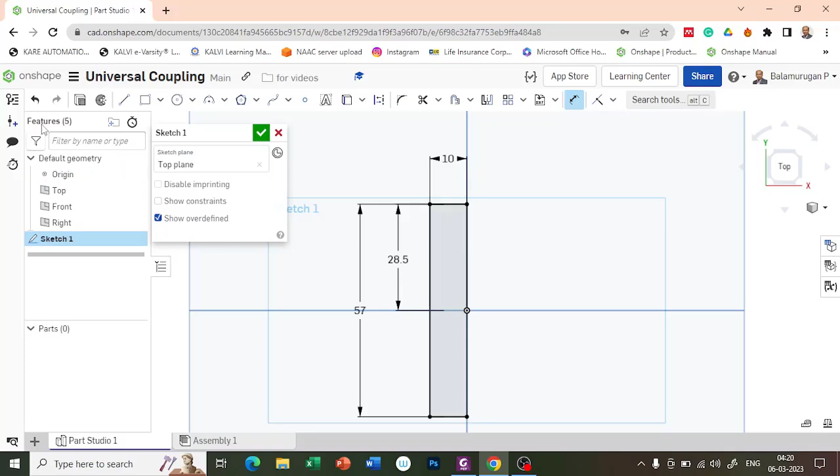Then a center circle which is of diameter 16. Then a second circle which is of radius 15, so diameter is 30.

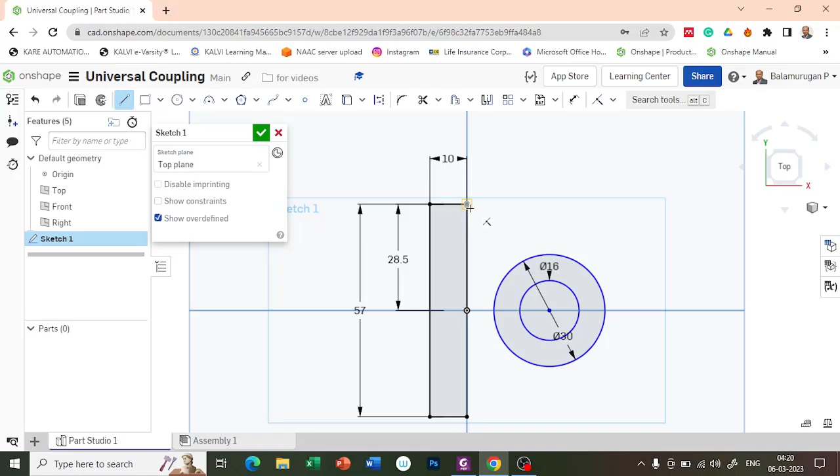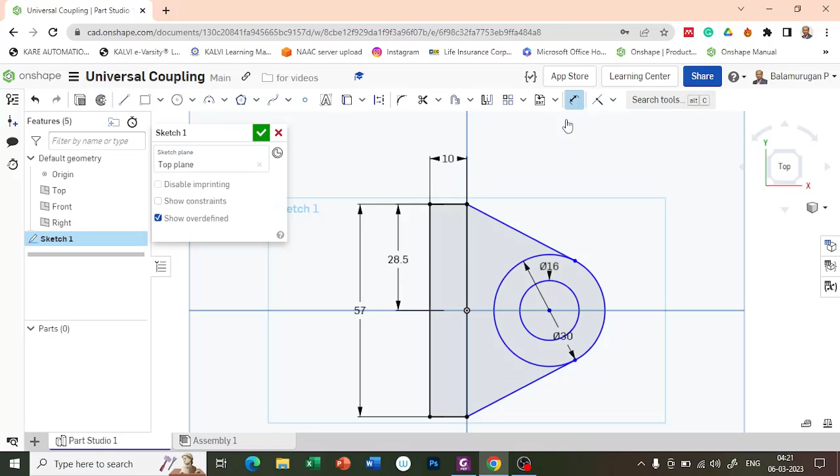Let's try to draw tangent lines from here, from here. The center distance between this end and the inner portion, so here it is 18.

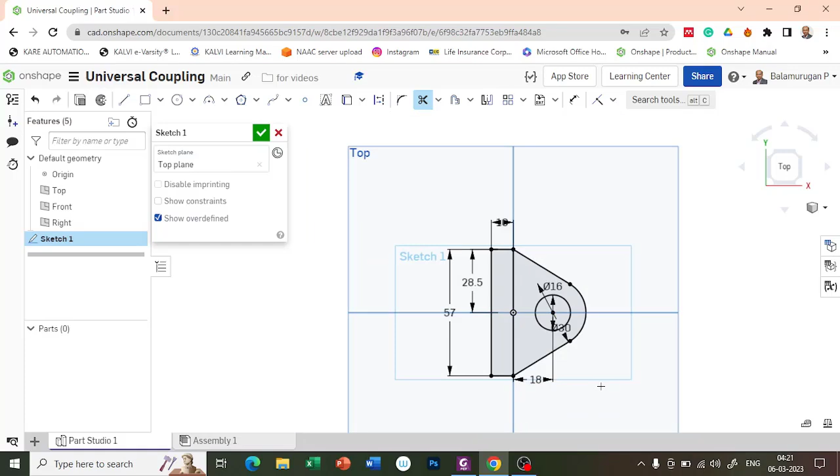And let's try to trim this portion which is not wanted. Okay, so let's confirm this.

So this one I'm going to extrude for a height, so extrude this two, which is symmetric, for a total height of 16 plus 56 plus 16.

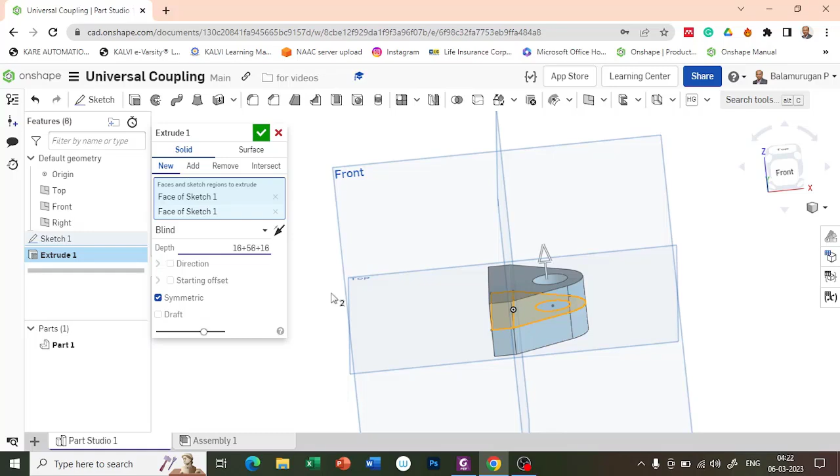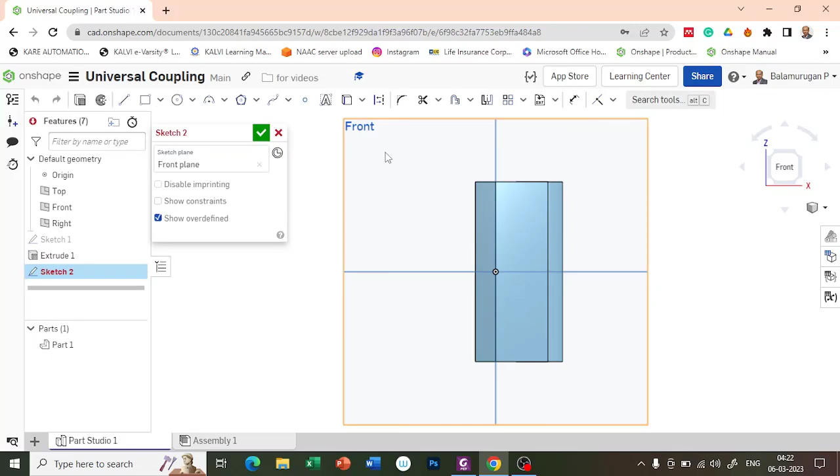So now we are going to make a cut over here. Let's make a sketch on the front plane, view normal to it.

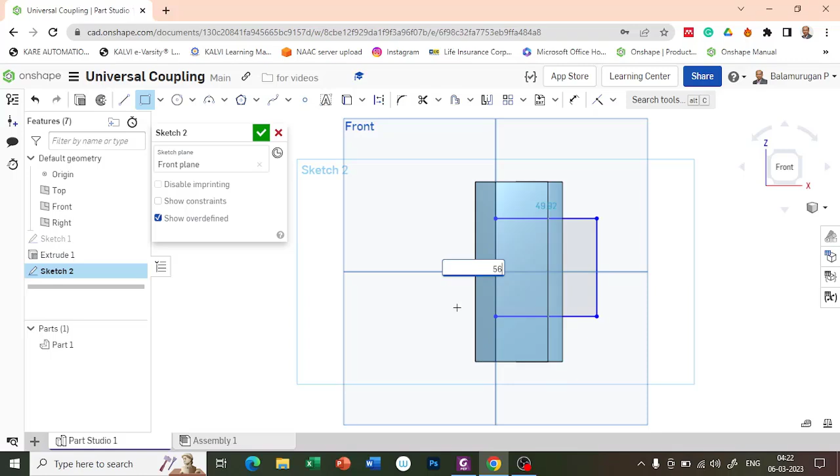Let's make a rectangular cut here whose depth is 56. The length you can define as anything beyond the material, and the center distance we have to provide, so 56 divided by 2, so that it will make a symmetrical cut.

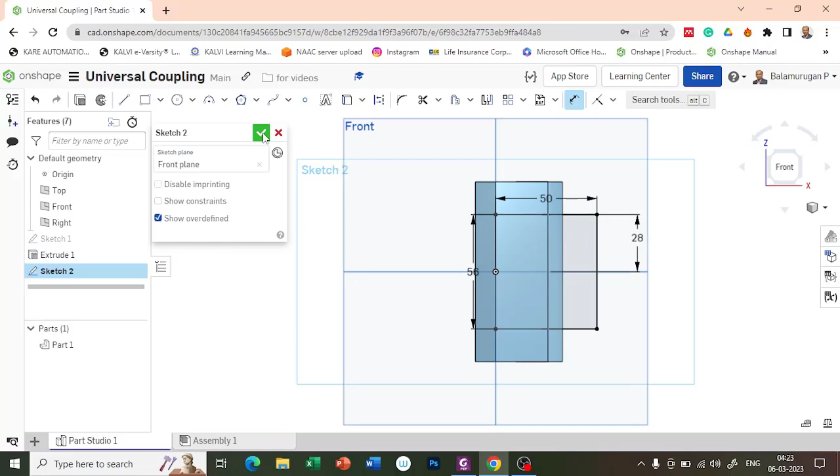Let's confirm it. So extrude this portion, it's a removal and symmetric. On both sides you have to make a through all cut, so you can get it like this. Confirm the part.

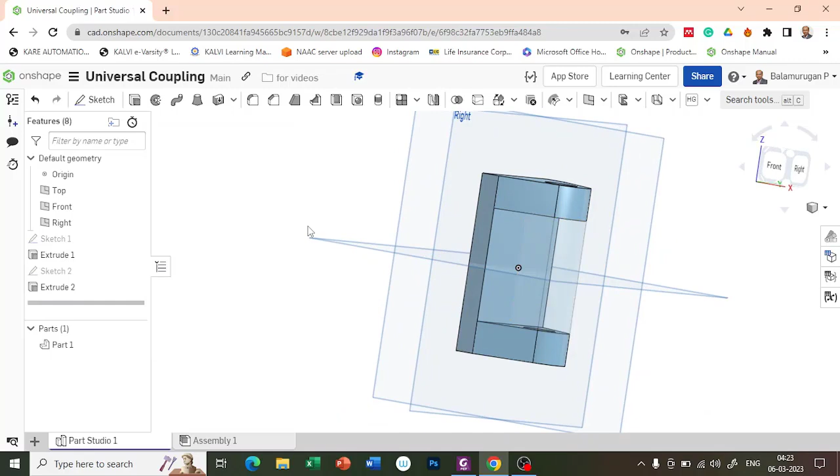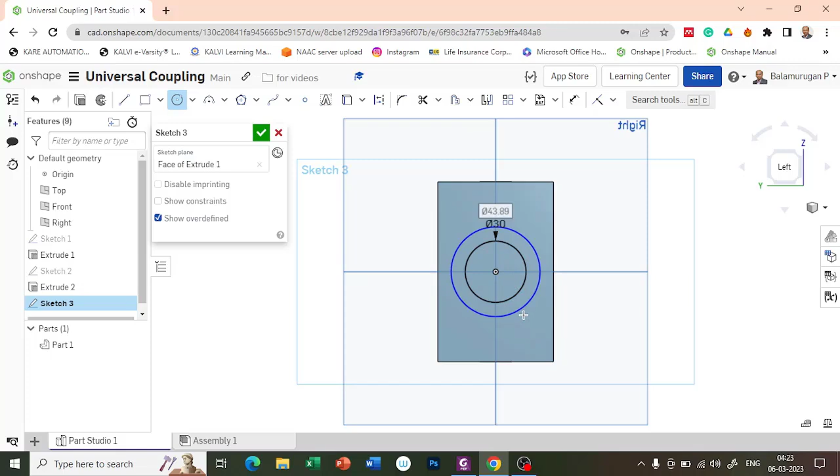Now on this surface I'm going to make a cylinder sketch. Look perpendicular to it. So two circles I'm going to make, one is of diameter 30 and the other one is of diameter 55. Let's confirm the sketch.

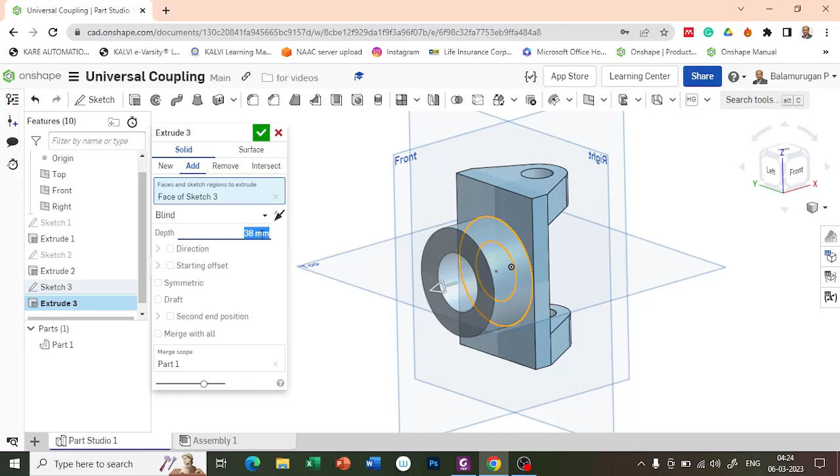This portion I'm going to extend for a distance of 38. So let me enter the distance as 38 and confirm it.

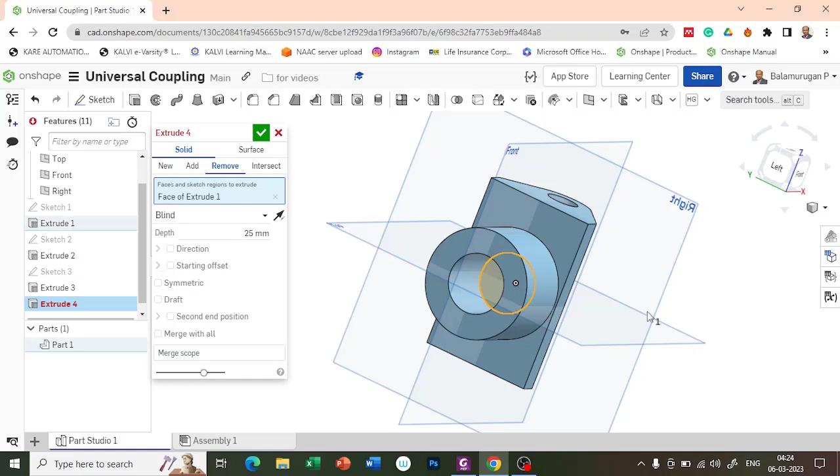So this circle, actually the cut has to come over here. Okay, so let us try to extrude, remove. The regions to extrude is that, it is coming on the other side. Let me make it simply through all and confirm it.

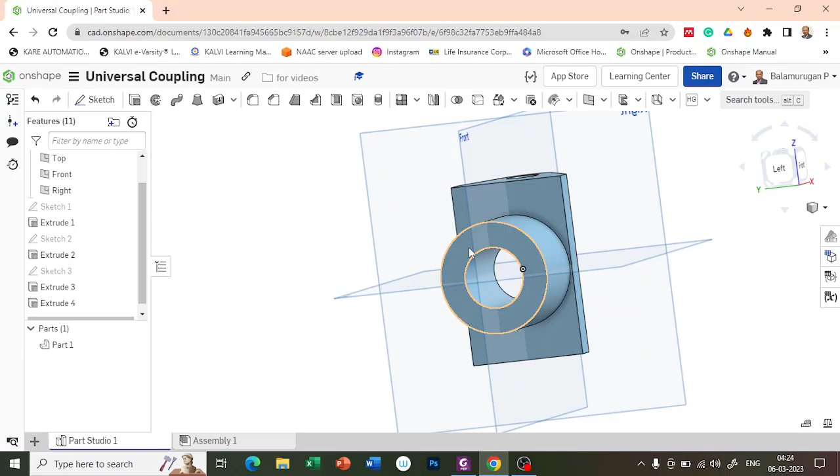Now we need the shaft and the key portion. A keyway cut is required, so let us try to make a keyway cut here. Sketch on this particular part, let's look perpendicular to it.

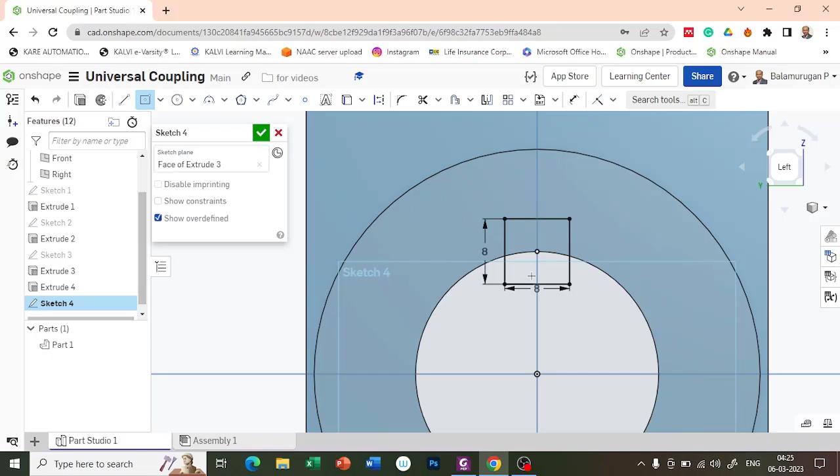Choose the center point rectangle on here. The key size they have given as 8 x 8, so 4 is the depth here. Half depth will be on the shaft and half depth will be on the key, so let us make the square here of size 8 x 8 so that the half cut will be on the shaft. Let us try to make this particular cut.

Extrude this one, I want to remove it through all. So we have made the keyway.

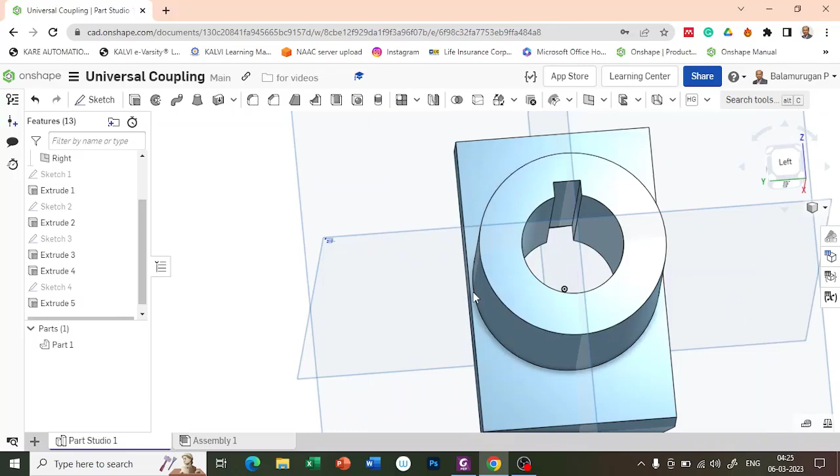So now the first part is over, this part is called a fork. So let me rename the part as fork, and rename the part studio file also as fork, just for easy pickup.

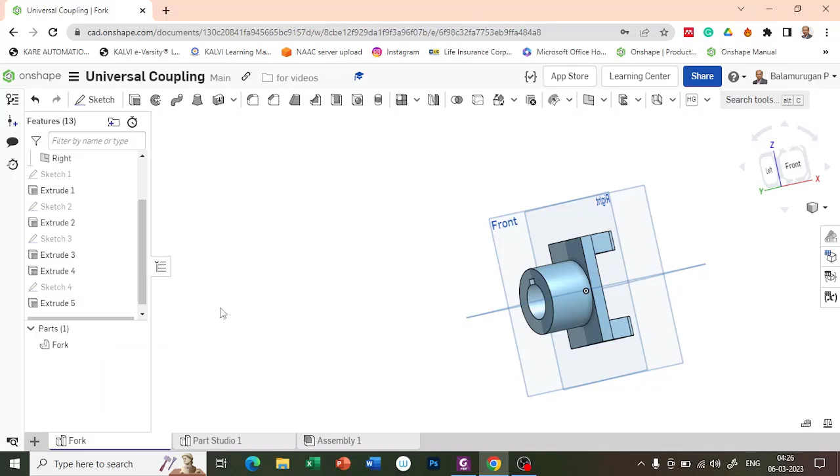Let's try to make the second part, which is called the central block. So let's add the part studio and try to make all the components on different part studios. Let me rename this part studio as central block. In this central block, we have two hollow cylinders clubbed together in a perpendicular direction.

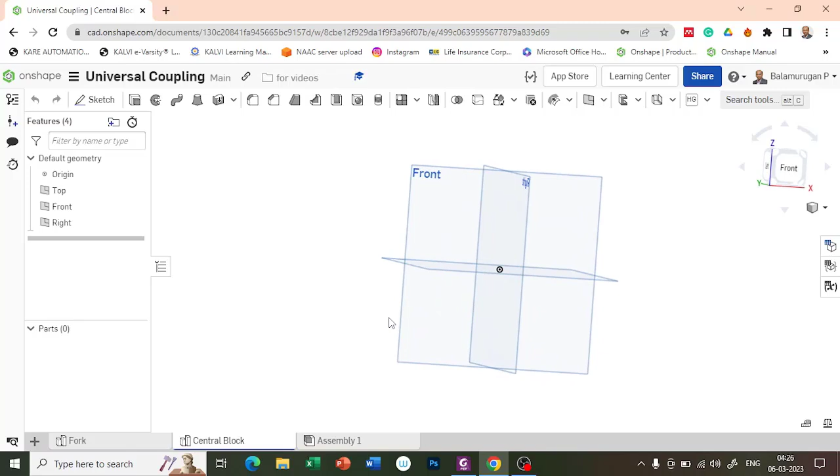First, let us try to make it on the front plane or top plane, any one you can do. Let us try to make it on the top plane first. View normal to it.

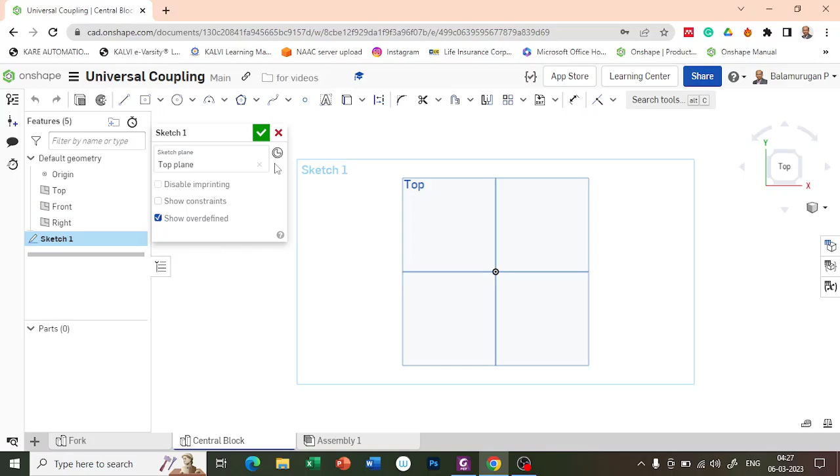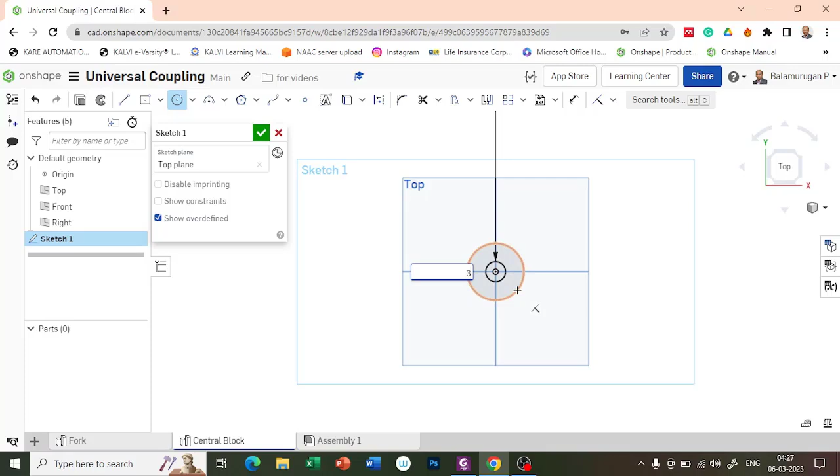So here I'm going to draw two circles. One circle is of diameter 16, and another circle is of diameter 30. You can see it over here.

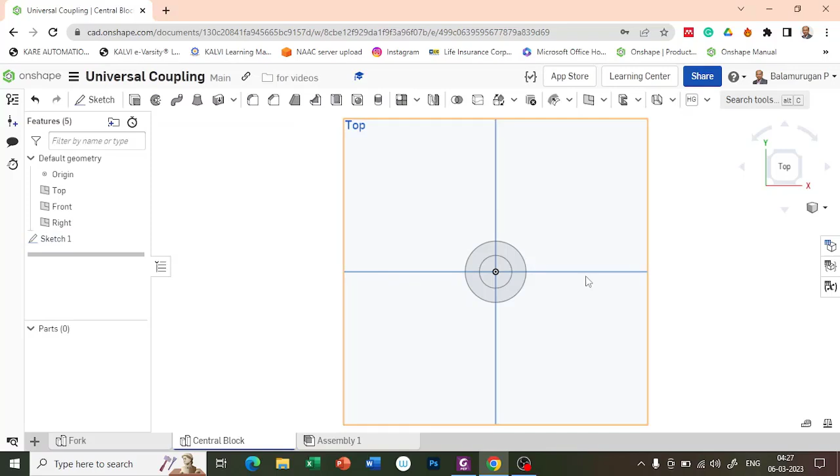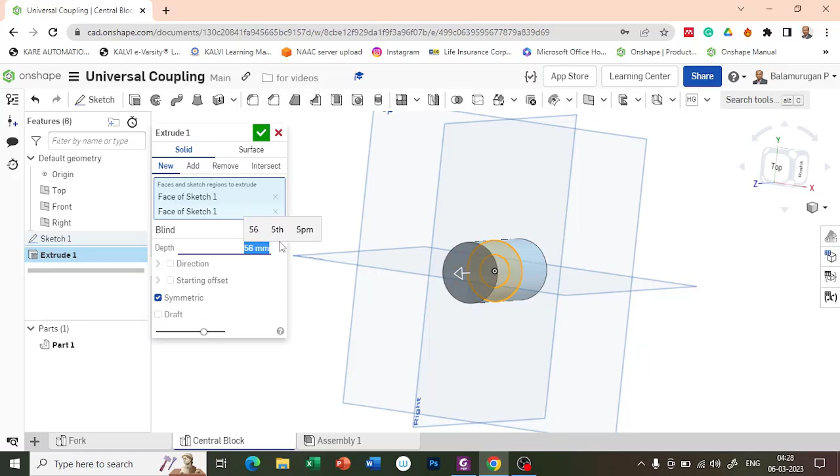Let's try to extrude both circles. Later I will make a cut. So let's try to make an extrude of both circles, extrude it symmetrically with a depth of 56. Confirm. So this is on the top plane.

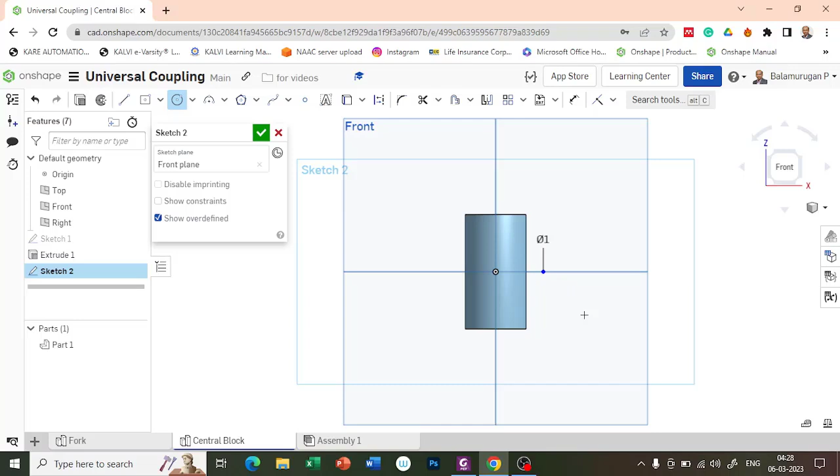Let's try to make another sketch on the front plane and view normal to it. Let's draw two circles here, one is of diameter 16.

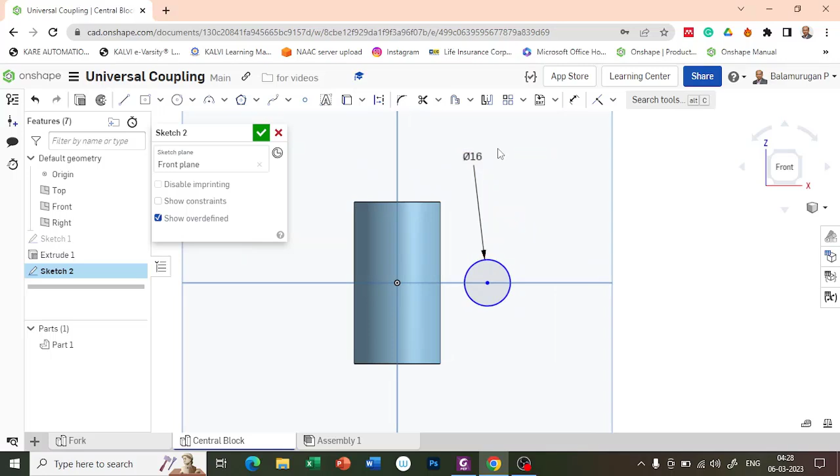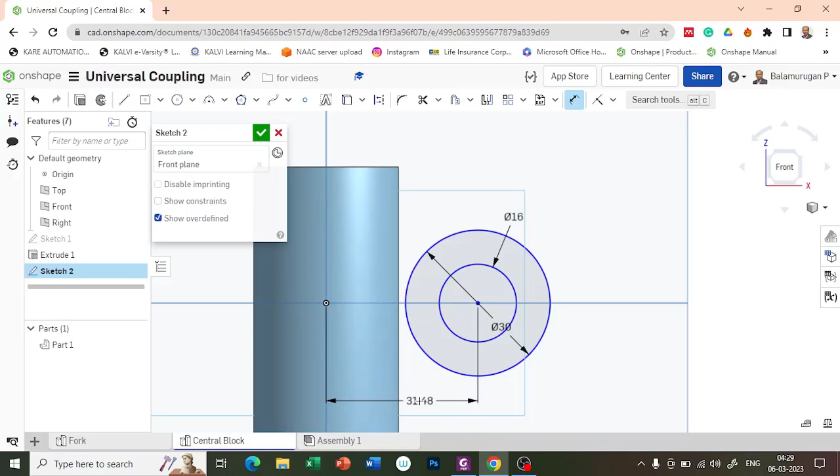And another circle of diameter 30, and the center distance between this concentric circle and this center - they have given it as 18. Okay, so let's confirm it.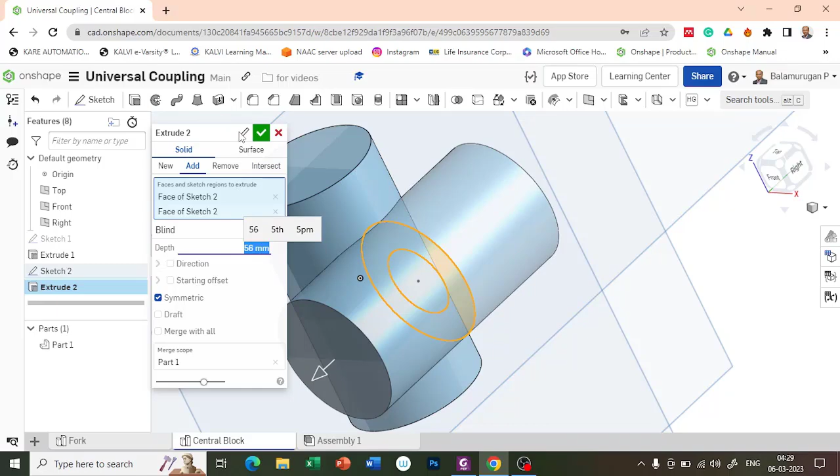Now let us try to make the extrude of these two circles in a symmetric way for a distance of 56. Let's confirm. So we have two cylinders which is in a perpendicular direction.

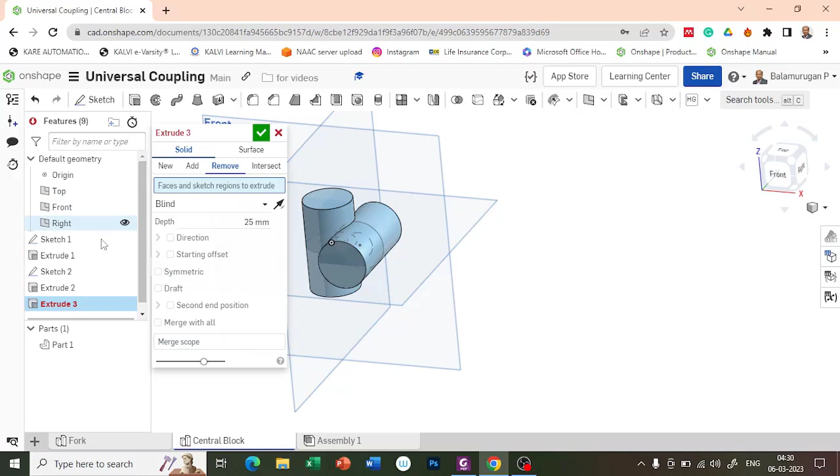Now let us try to make the hole cut here. So extrude, remove. The sketch region to extrude is, let's activate sketch 1 and sketch 2. One by one, let us try to make an extrude. So in sketch 1, let's hide this part.

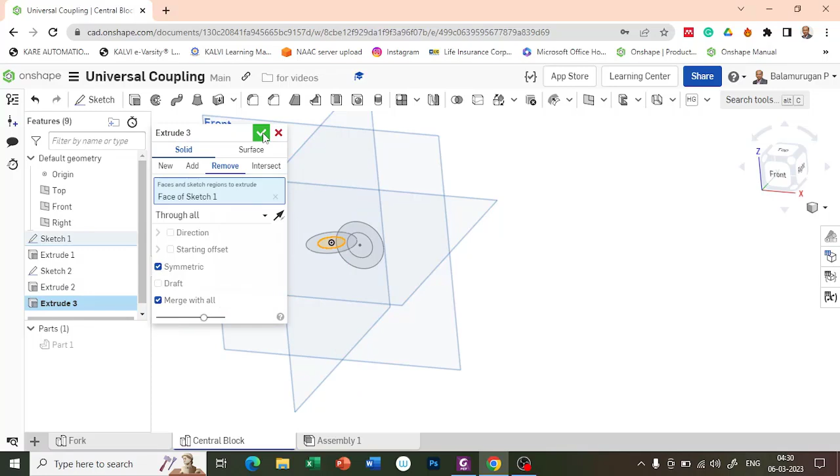Let's make it as through all and symmetric. So this one I'm going to extrude it. For merge scope, you give merge with all. Now if you activate the part, you can see a cut over here.

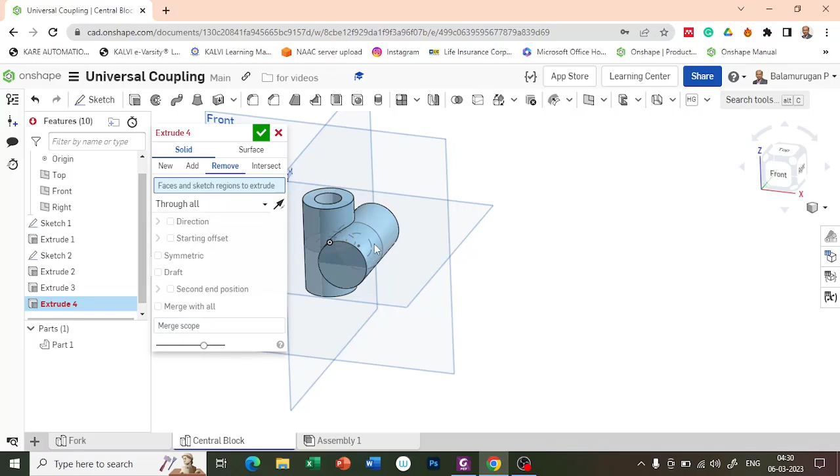Similarly, you do it for the second one. So extrude, remove, change it as through all. The sketch region to extrude is the center circle. If you are not able to select, just hide the part and select the portion. So it is symmetric and you give the merge scope as merge with all.

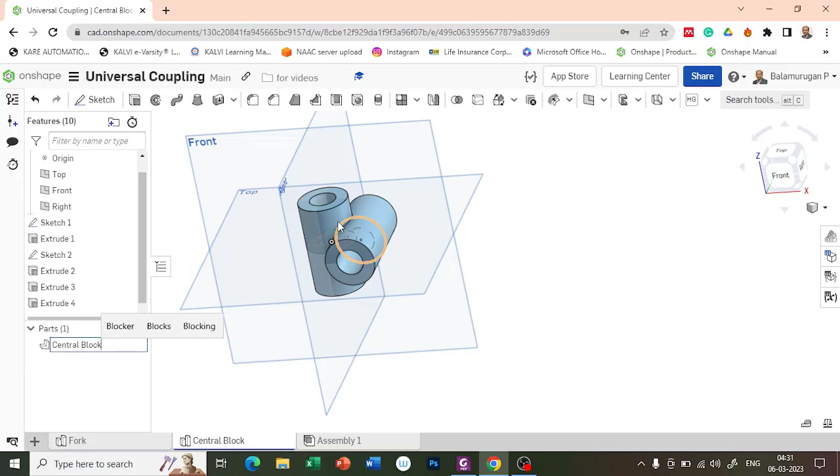Now you can get two hollow cylinders, one attached with another on the central portion. Okay, so now we have made the central block, so let's rename it block. Now let us try to make the shaft, key, pin and collar. Let's try to make it.

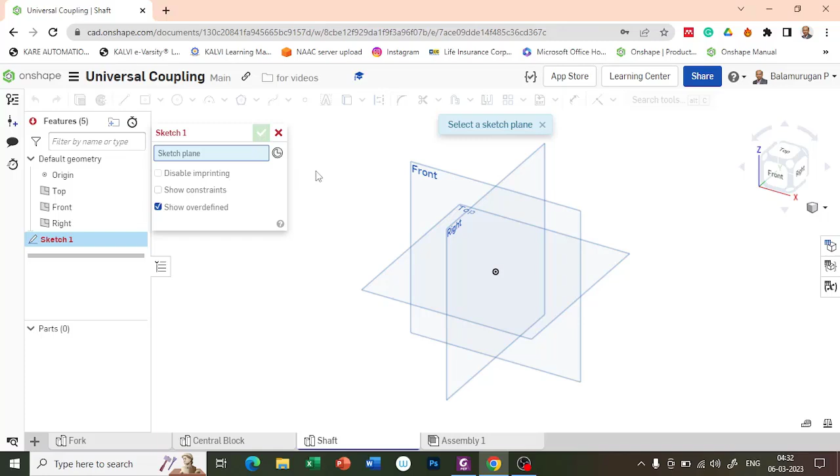So let us try to insert or create a new part. In this part, I'm going to make the shaft. So let's rename it, I'm going to make it as a shaft. So in that, let me select the sketch plane as a frontal plane, view normal to it.

Draw a circle which is of diameter, the shaft diameter is 30. And then we have to make a keyway here. So for that, I'm going to make a center point rectangle which is of size 8 cross 8, and let's try to remove the portions, or you can just select this portion, automatically it will extrude only that. You need not trim it.

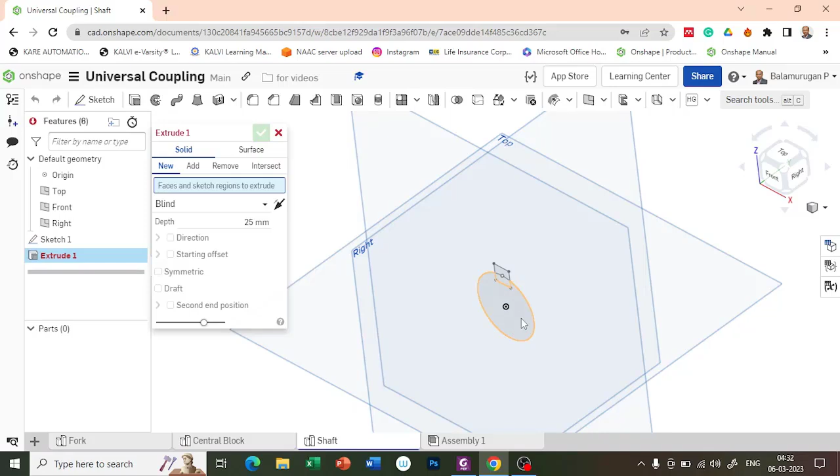You can do the extrude of only this portion on both sides. Let's try to make it, or one side is also okay. So let us try to make it as one side. Here the length of the shaft, let me consider it as some 100 mm.

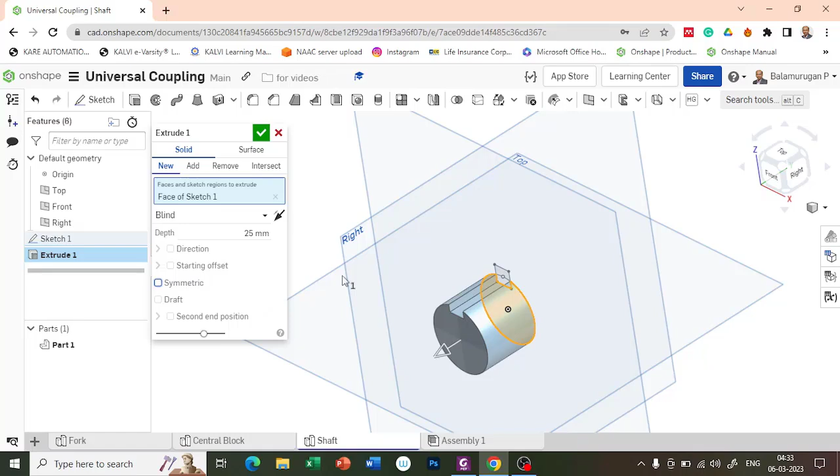Now let's try to make the key. So this one, let me rename it as a shaft. Next, I'm going to create another part studio for the key.

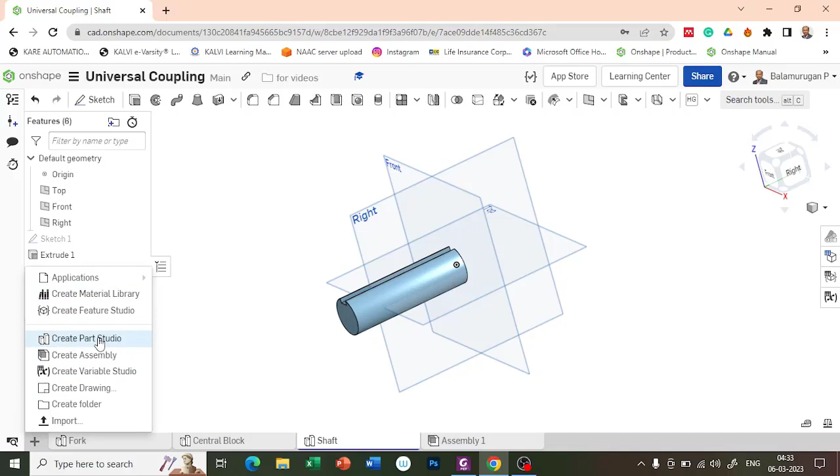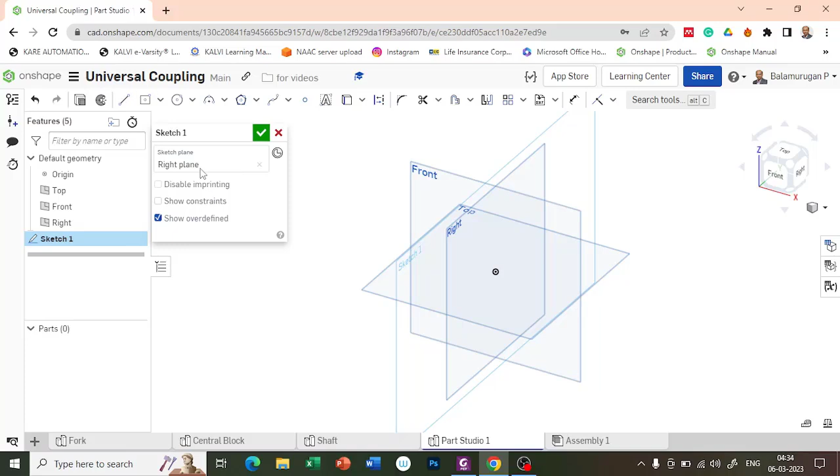So for the key, let's try to make it on the front plane, a sketch. Okay, I will try to make it on the right plane, sorry. So right plane, and view normal to it.

So here I'm going to draw a square of 8 cross 8 because that's a key cross section, a square sunk key, 8 cross 8. Let us try to extrude that for a distance of 40, which is given. Extrude for a distance of 40.

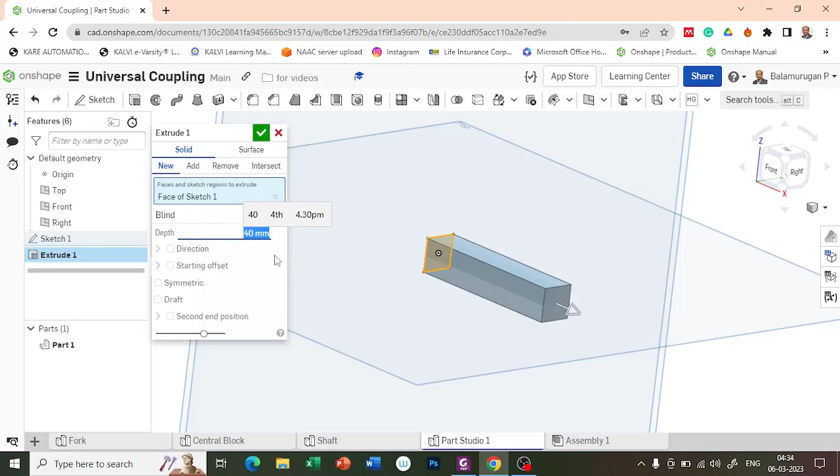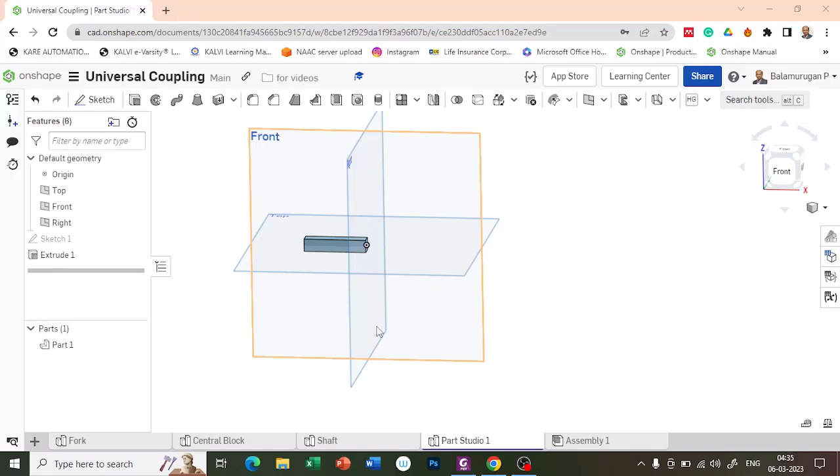Okay, let's confirm that. But here they have provided the draft angle. So you just calculate what is the value of the draft angle, because they have given the slope as 1:100. So if you calculate the tan inverse of 1/100, you will get it as 0.57 degree. Okay, so that is the slope angle, 0.57 degree.

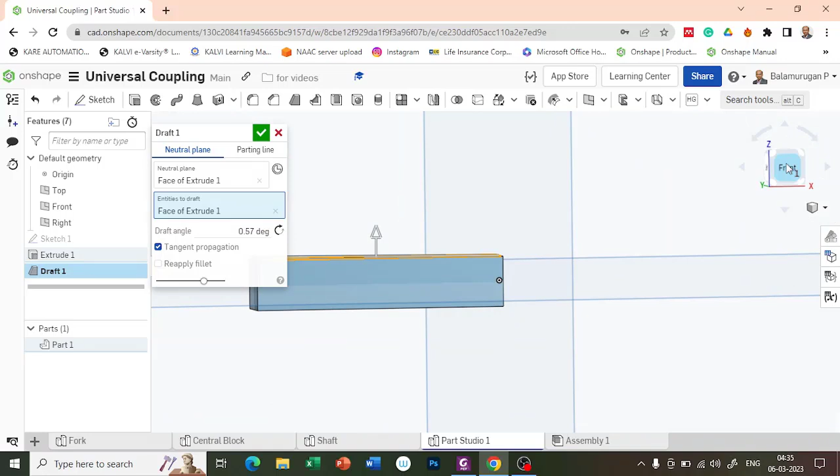So you try to use a draft, and select the neutral plane as the side face, and the entities to draft is the top face. Okay, so here it is trying to move up, but I want to move down, so on the other direction. Let's confirm it. So here's how we calculated the degree based on the slope.

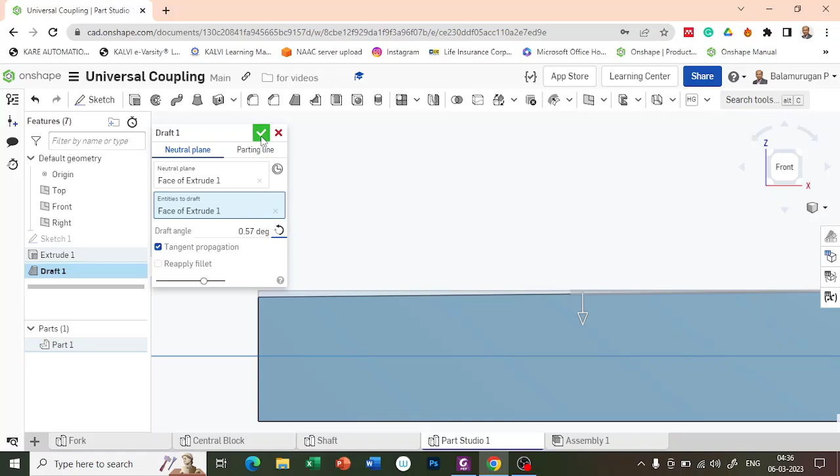The slope is 1:100, so I had given the value as tan inverse of 1 divided by 100, which is 0.57 degree. So let's confirm it. Rename, and this is a key. And let's rename this part also as key.

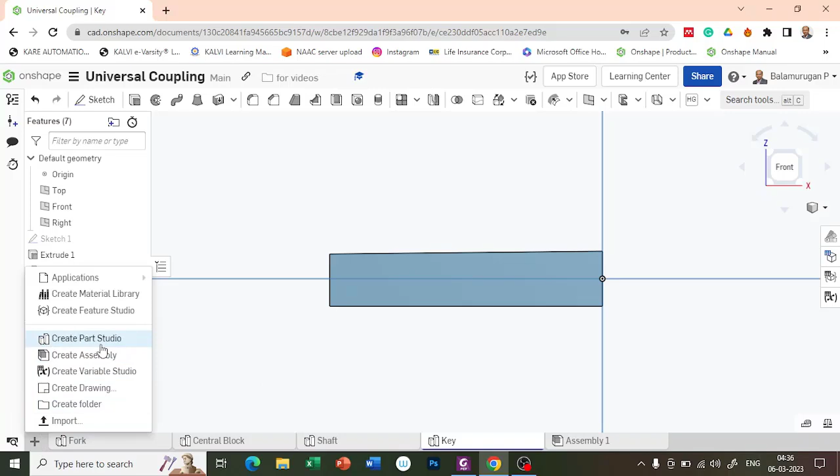Okay, so the remaining part is your pin, collar and taper pin. Let's try to make it on the same part studio. Okay, let's try to create a part studio again. So this part studio, let me rename it as pin, collar and taper pin.

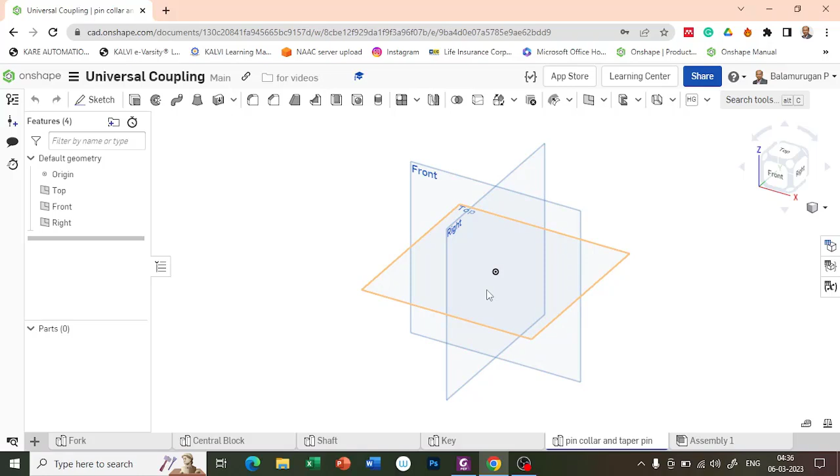So here we are going to make 3 parts: pin, collar and taper pin. Okay, so let's try to draw it on the front plane. Make a sketch, view normal to it.

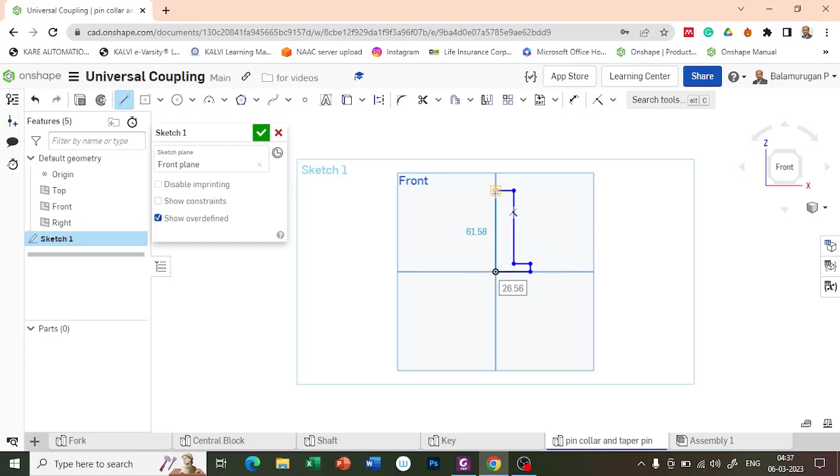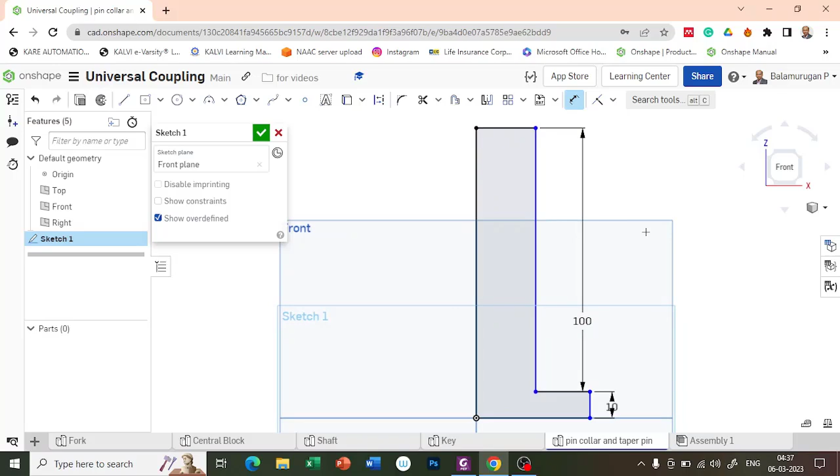So here you draw the cross section, a revolving cross section for the pin, and provide the dimensions. Okay, so here this dimension is given as 10, and this dimension is given as 100. Okay, and this diameter is given as 16. So you can draw an axis.

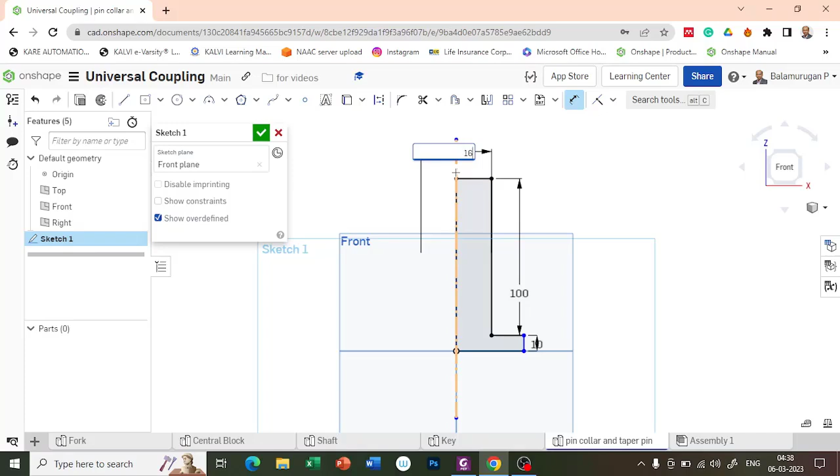You can draw an axis here, and you can define the axis as 16. The diameter from the axis is given as 16. Then the bottom diameter from here to the axis is 25. So I had given it in terms of diameter.

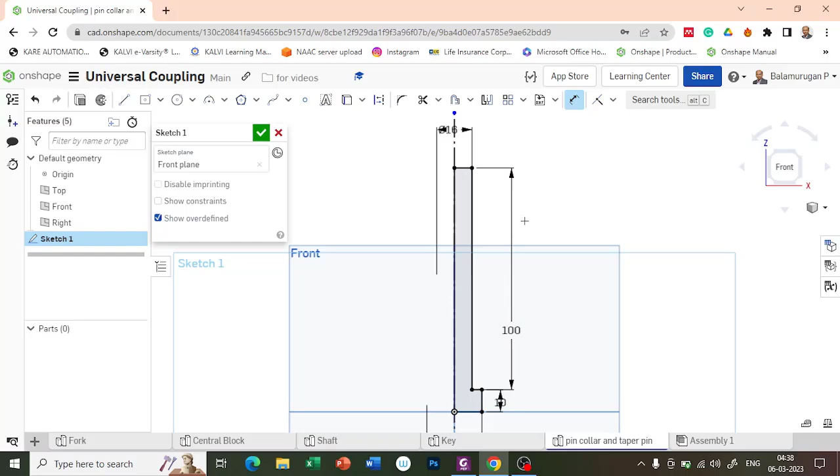So here we will try to make the cross section for both pin and collar. Let's try to make it for the collar. In the collar, there is a common hole for the pin as well as the collar. That hole is 6 mm from here, and the total depth of the collar is 12 mm. So let us try to make a rectangle.

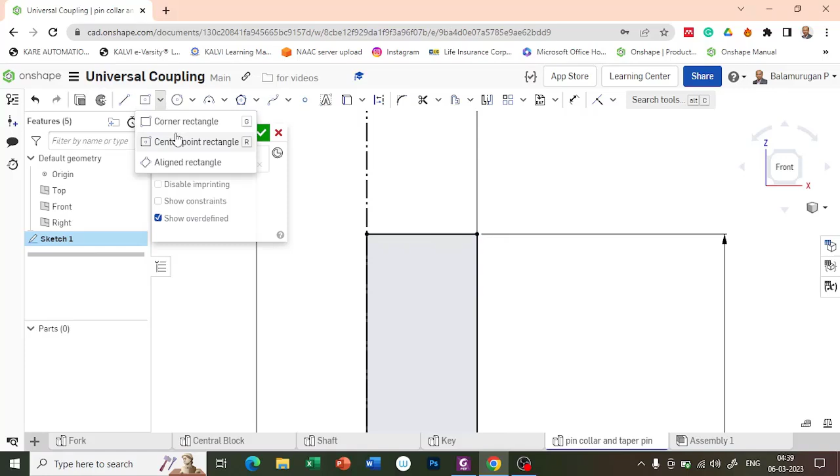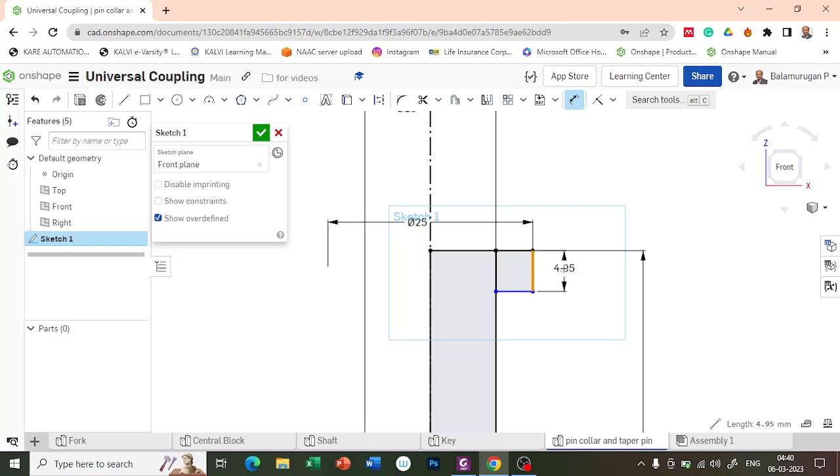So let us try to draw a corner rectangle from here. This dimension from here to here is given as 25, and the inner dimension is already there, which is also given as 25. So let's try to provide this height, which is 12. Let's confirm the sketch.

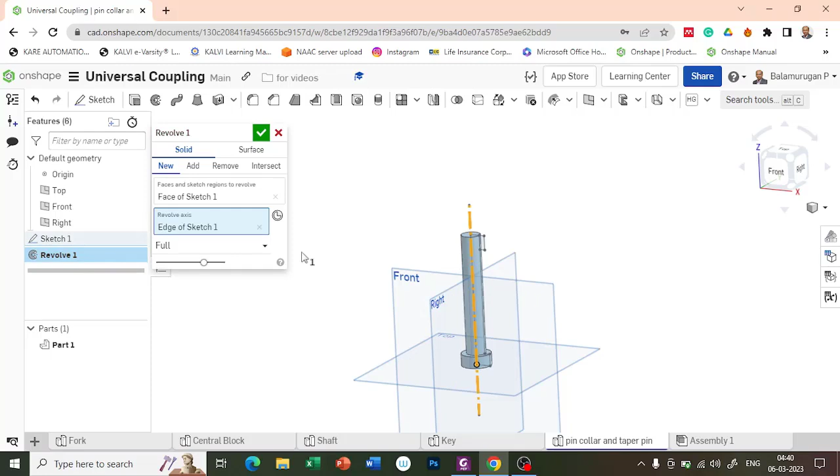Now let us try to make a revolve. This part, if you revolve it with this revolve axis, that becomes a pin. Let's confirm that.

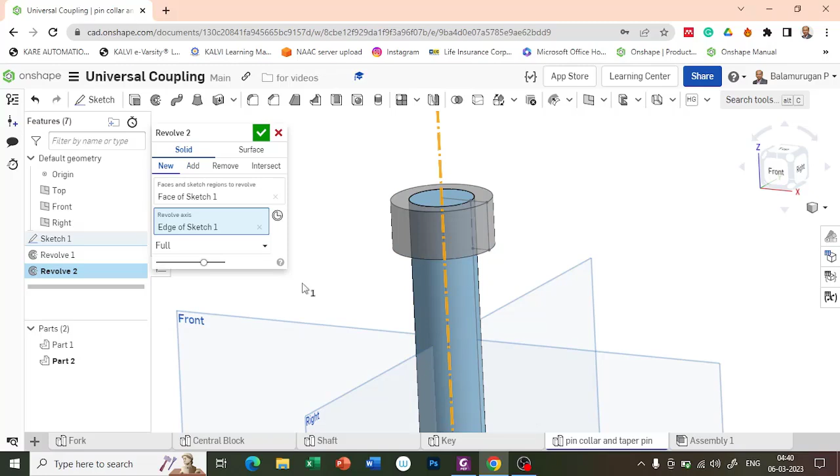Then again we are going to make a revolve using this sketch. This portion I am going to revolve, and the revolve axis is going to be same. But here it is defaultly showing add because the two materials are attached together. I don't want to add these two materials because these two parts are different. So let's make it as a new body and confirm it. By using the same sketch, you can create multiple parts.

So now the collar is made. Let's try to make a tapered hole here and the taper pin here, at the same time.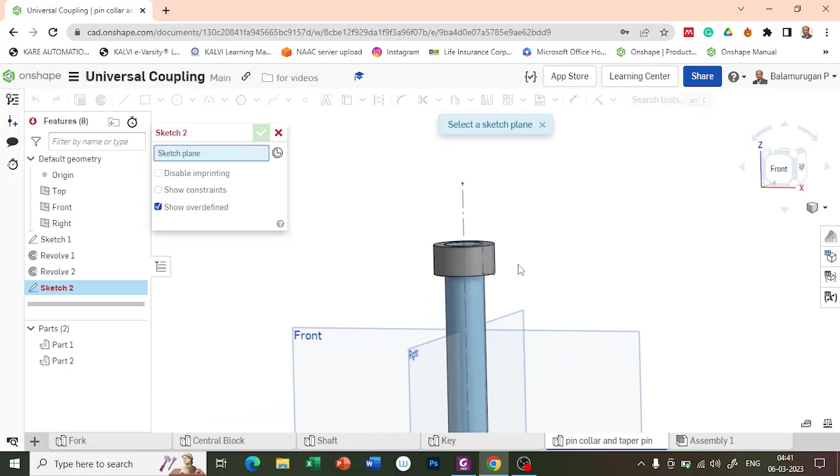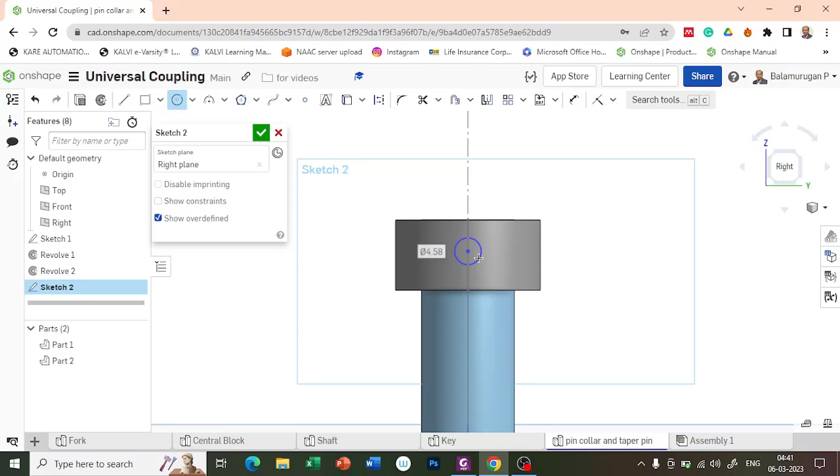First let us try to draw a taper pin here. For that, let me make a sketch on the right plane and view normal to it. Here they have given the taper hole size as 3 mm, so let us draw the 3 mm diameter on the center, and the distance of the center from one side is 6. Let us confirm it.

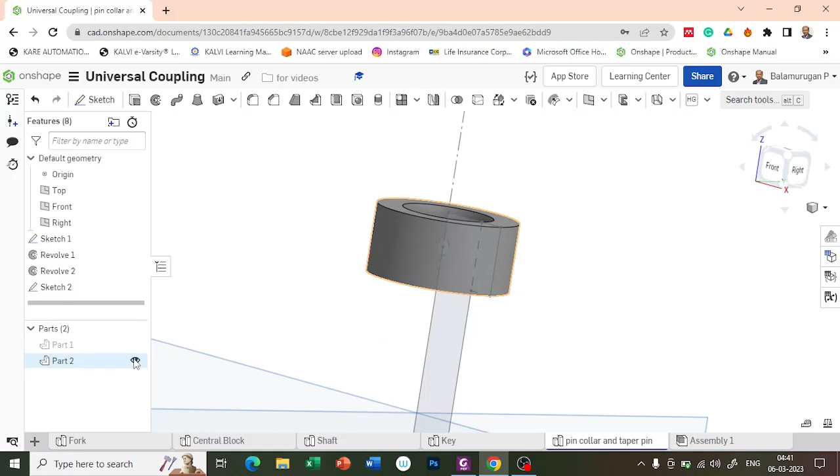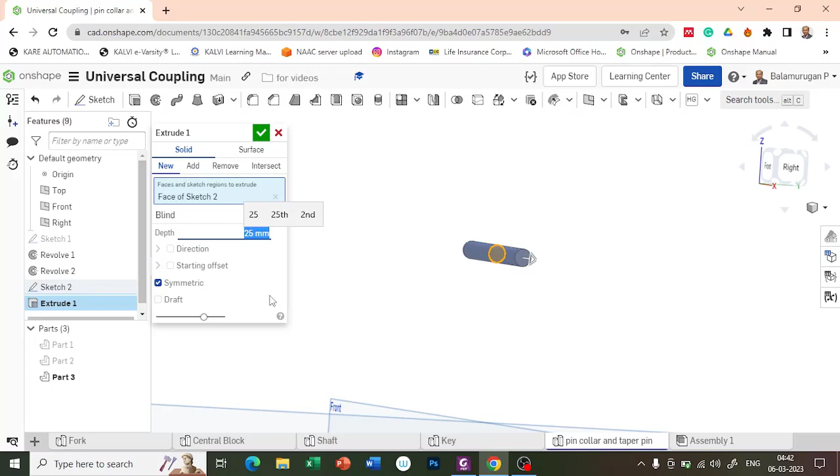Okay, let's hide these two parts first. So here you can see the sketch. Sketch 1 I have deactivated, only sketch 2 is active now. Now let us try to extrude this part symmetrically for a distance. I think the pin size is not given, so let me assume it as 25 mm, equivalent to this.

Then you have to provide the draft angle for this. For providing the draft angle, we need to calculate the slope. So let me assume the slope here as 1:30. If you provide 1:30, then the taper angle will be 0.96.

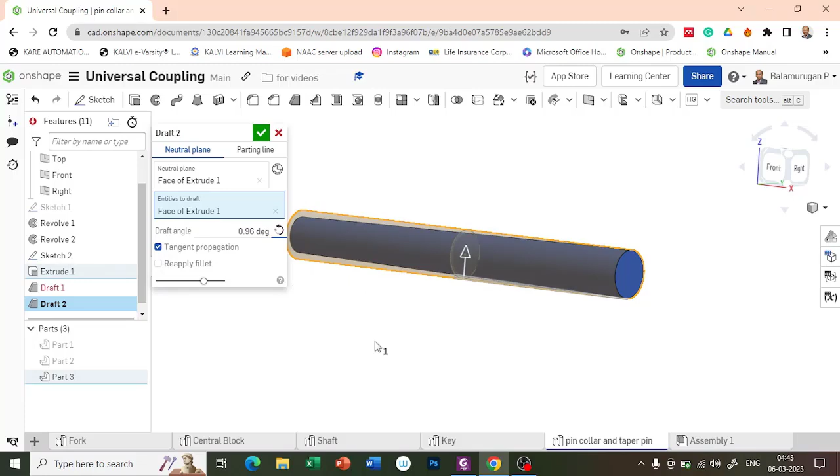Then you select the draft. In that, the neutral plane is this, and the entities to draft is this. Let me do it on the other side. So this is the draft angle. Let's confirm that.

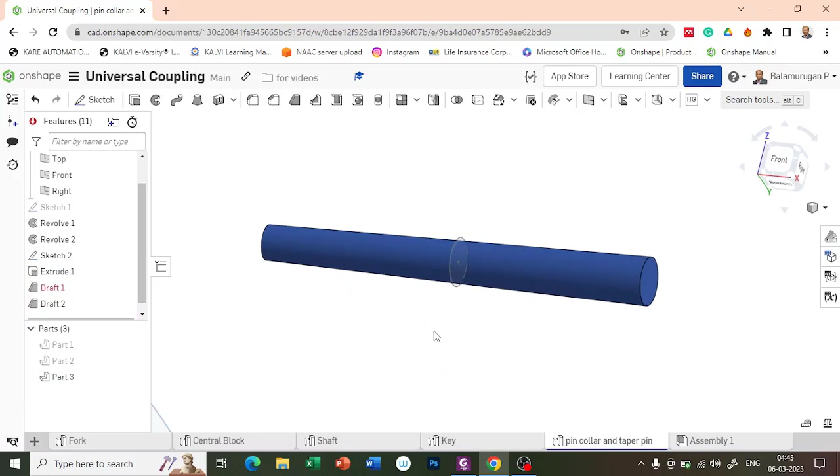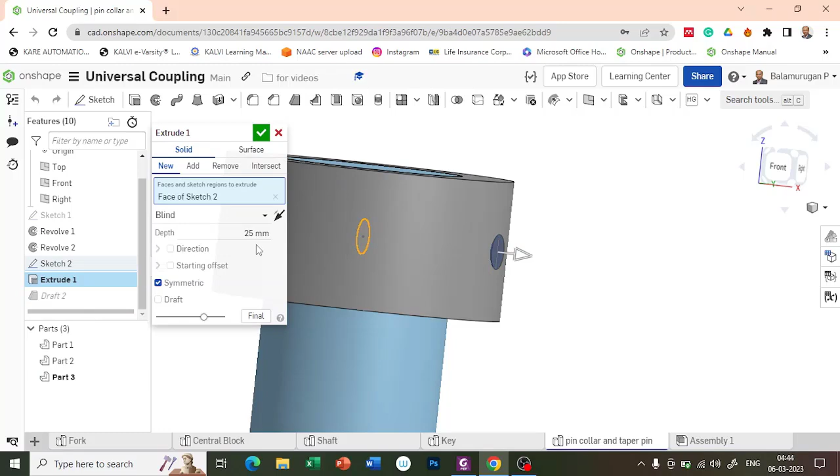Now we are going to activate this tool, you can see it over here. It is equivalent to this draft. But you see here, this distance is exactly equivalent to this. Let us try to make something beyond that, so let me make it as 40 mm and confirm it. So you can get a pin like this.

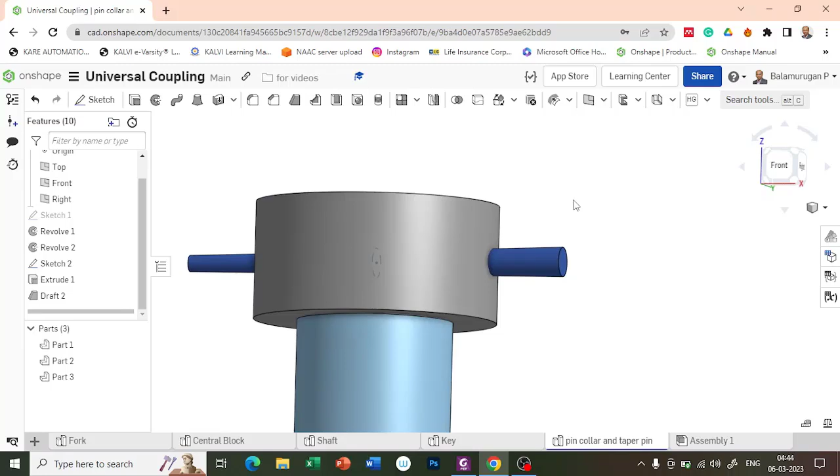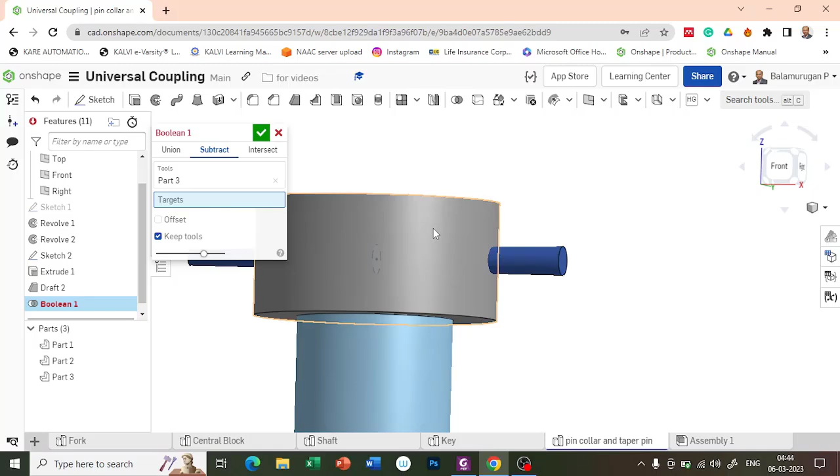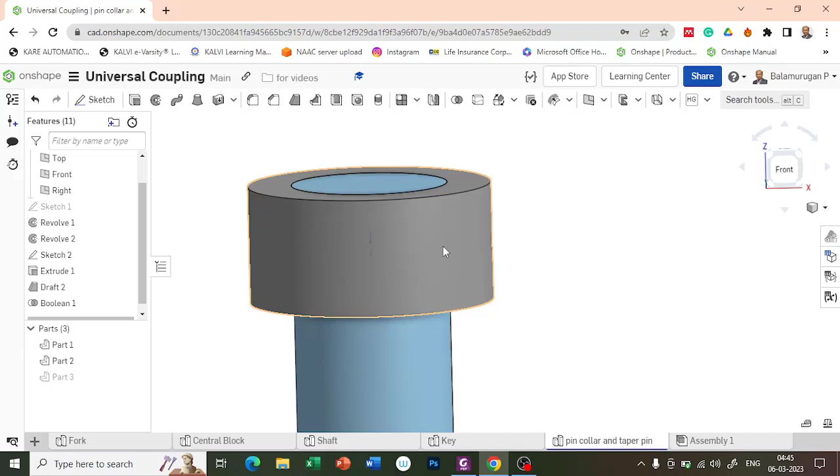But you see here, only the pin is there, there is no hole. So let us use a boolean command called subtract. In this boolean, I am going to use this pin as a tool and subtract it. So this is my tool, and the target is this collar part and the shaft part. You have to keep the tool so you don't need to draw this pin again. Let's confirm it. Now if you hide part 3, you can see a hole here. So you don't need to draw the pin separately if you keep the tool, otherwise you have to draw the pin again.

So now we have completed all the parts of the universal coupling: fork, central block, shaft, key, pin, collar, taper pin. All parts we have seen. In the second video, we will assemble all these parts together and create a drawing. Thank you.